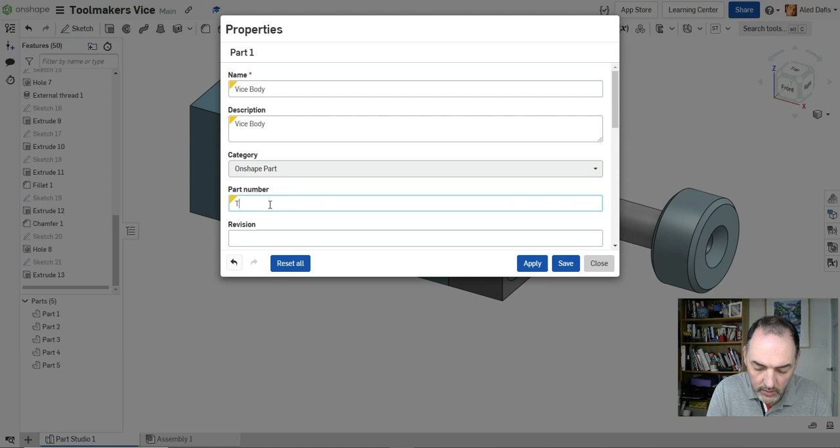So before we start with the engineering drawing, we need to do a little bit of admin. These 5 parts we created need to be labelled and given names. So I'm going to just pick on part 1, right click, properties. Okay, the description for this part is vice body, and we can Control C, give it a name as well, Control V. Okay, the vice body, and give it a part number. I've numbered all of these parts, Toolmakers Vice TV, and this is 001. Apply.

Close. Just to save time, off screen I've renamed all of these parts vice body, vice end cap, vice jaw, vice screw and knurled nut, and given them their part numbers as well as in the drawing that you've got in front of you. So one other admin task that we need to do before we continue with the drawing is to create an assembly.

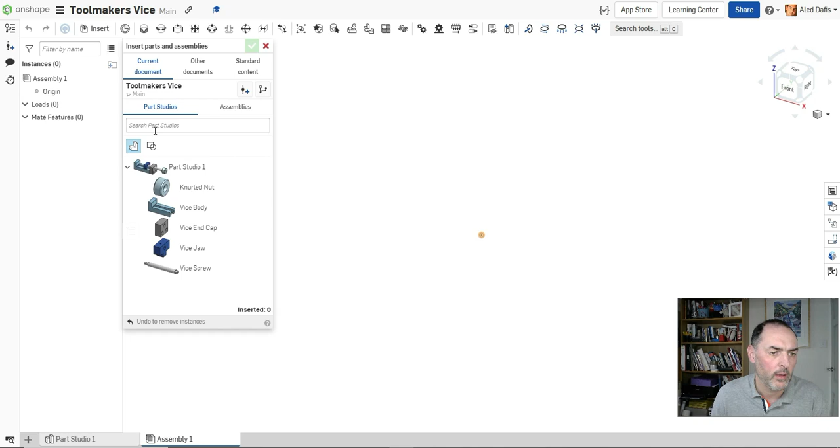Okay, these parts exist in the part studio. We need to create an assembly just to bring these parts in. So we can join parts together. We can do lots of really clever stuff in assemblies, but just for the purpose of this exercise, we're just going to bring them in so they exist in the assembly. I'm going to press Insert, and I'm going to bring the whole part studio in as one part and accept that. Okay, the only reason for doing this is that we can put together a bill of materials in the drawing, which I'll show you in a minute.

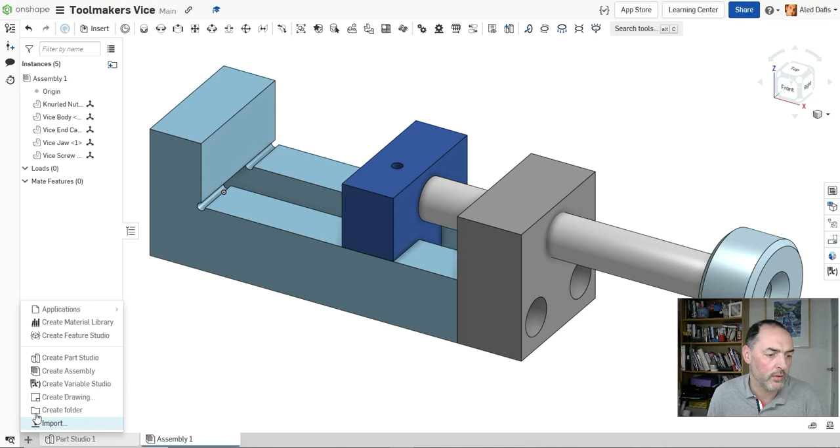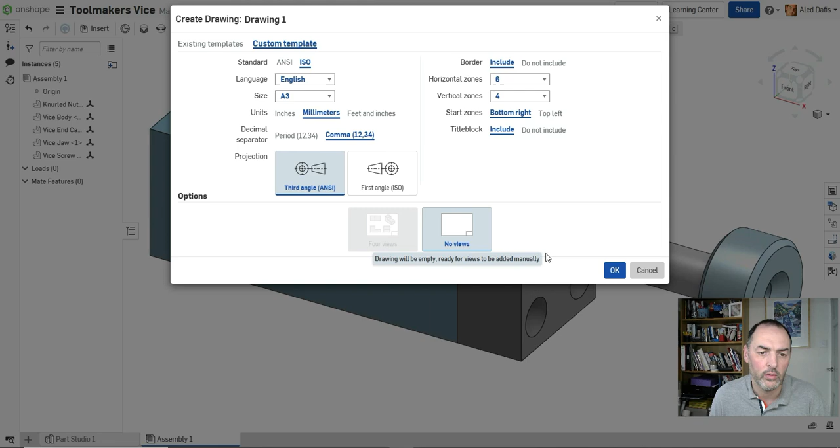Okay, so for the engineering drawing itself, we need to insert a new element, create drawing, and we're going to use a custom template as usual, ISO English. This is going to be an A3 drawing in millimeters using the comma for a decimal separator, third angle, really important, and the border is going to have 6 horizontal zones and 4 vertical zones, including a title block, no views. Just let that load for a minute.

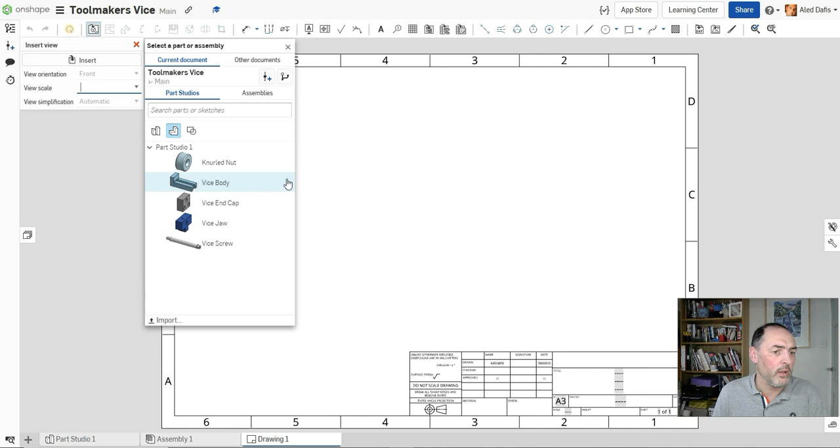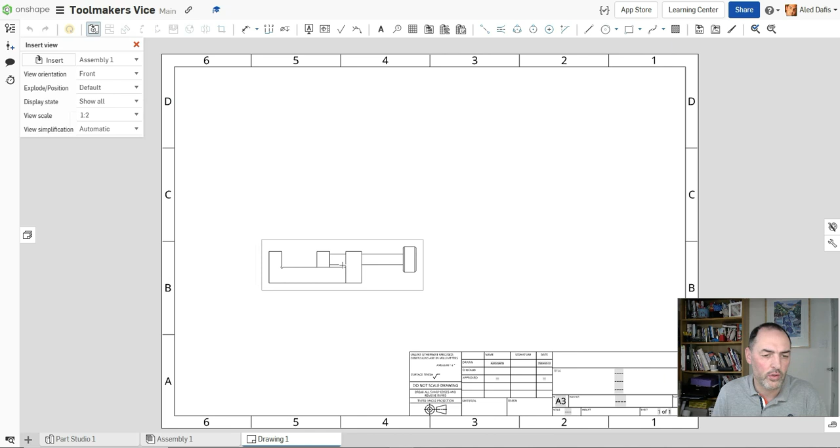There we are, that's our A3 drawing, and we're going to insert an assembly. So rather than part studio, we're going to insert assemblies here. I'm going to insert assembly 1, and that looks a little bit small on my drawing. The view scale is 1:2, so this is showing it half scale. I'm going to change that view scale to 1:1, full scale, and I'm going to drop the view on here. I'm going to drag up and draw a plan view from above.

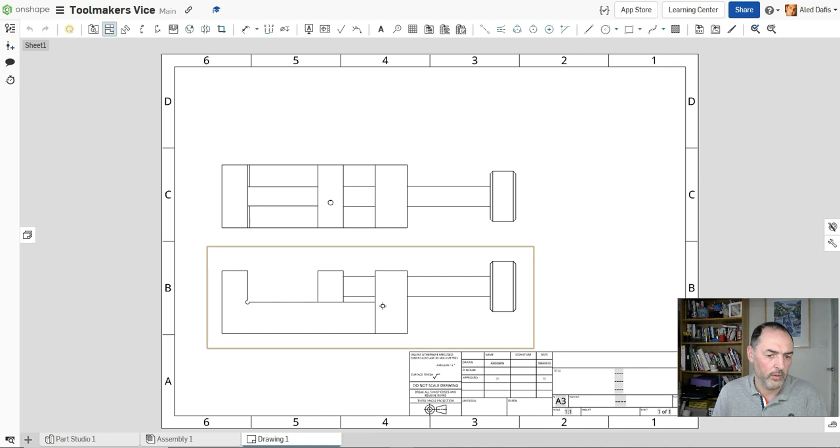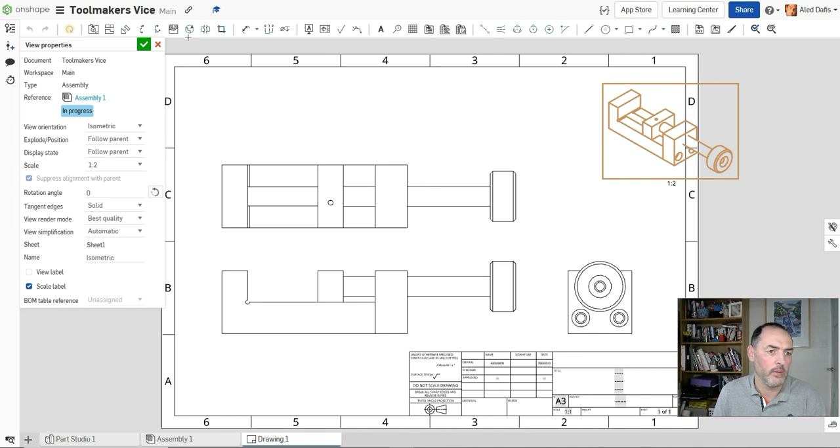I'm going to click on our initial view and come to the right hand side, an end view, and I'm going to do the same again. Click on my initial view, come up to the top right and drop in an isometric view. The isometric view is too big, as we can see there, so I'm just going to press escape, right click on this drawing and go to view properties, and I'm going to change the scale on this back to 1:2 half scale and accept that. I can drag that and place it in the corner there.

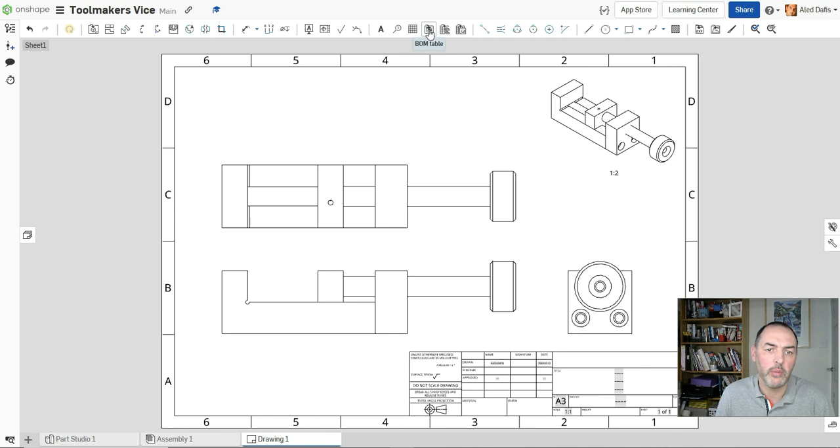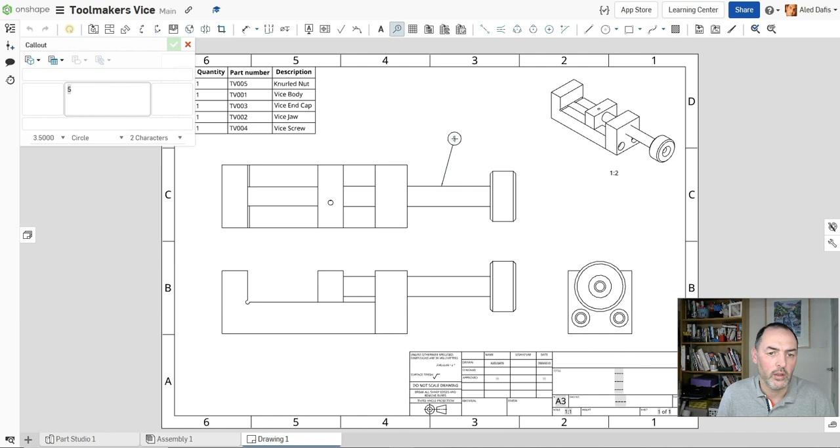Okay, that's really good. So this is just a general arrangement. This shows how all the parts go together, and it's got all 5 parts. Now the little bit of admin we did at the start to name all of these parts comes into play. We create a BOM, bill of materials, at the top here. I'm going to place this bill of materials in the top left corner. You can use the select fixed corner tool here, and then it will just snap to the corner. And that gives us a bill of materials, a parts list if you like, of all the parts, and then call outs, and we can put a call out for each of these parts. Excellent. So we've got all of these parts numbered exactly as we need them.

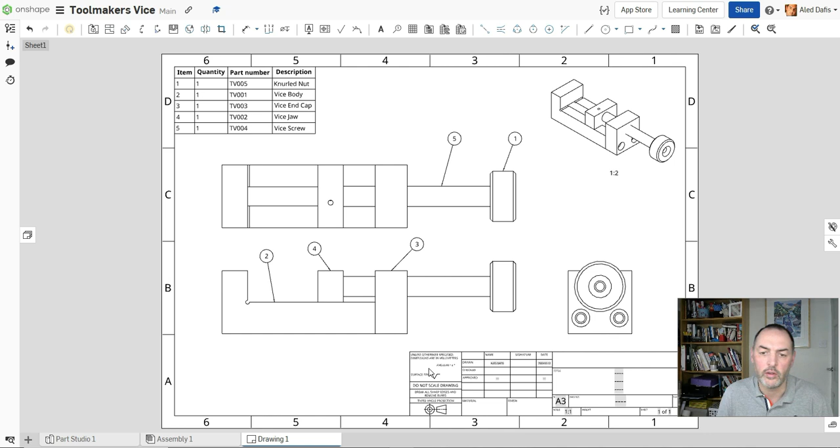Don't forget to add the details into the title block here. Title, Toolmakers Vice, drawing number, material will be bright mild steel, finish will be no finish, and we don't really need tolerances, but we can add in here general tolerance plus or minus 0.25 if you like. And that's all of the drawing block done. You've done that before, I'm not going to waste your time doing that.

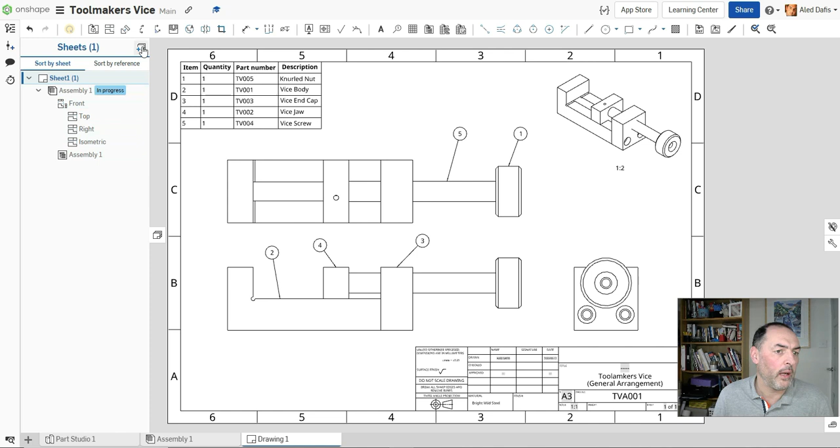Okay, the next step is to add another sheet, a separate sheet. This is the general arrangement, shows how it all goes together. So we're going to pick sheets on the left hand side here, and we're going to add a new sheet. So this automatically opens up a new A3 sheet, and if we're quite crafty we can fit all of these parts onto an A3 sheet, or if you want, add a few of the parts on, and then add another sheet to put all of them on.

Okay, so we're going to add parts here, insert view. I'm going to click insert. Now we're going to leave these as 1 to 1 full scale, they're smaller. I'm going to add the vice body.

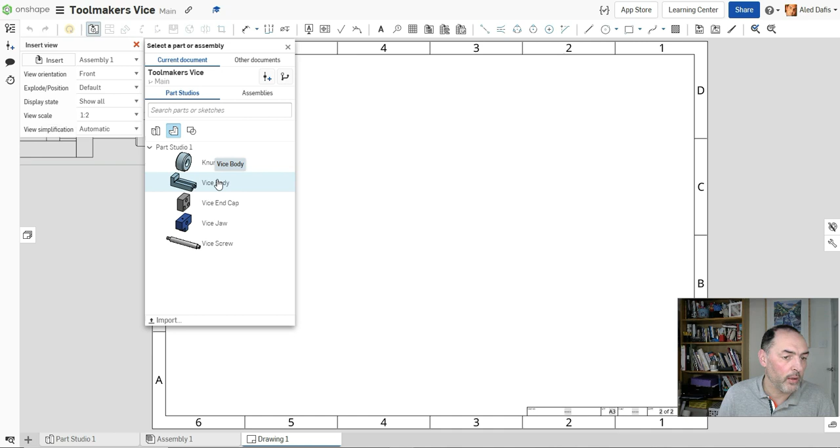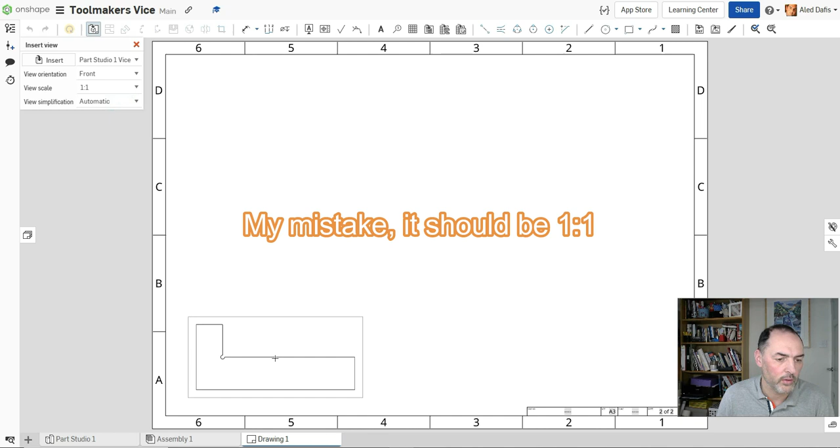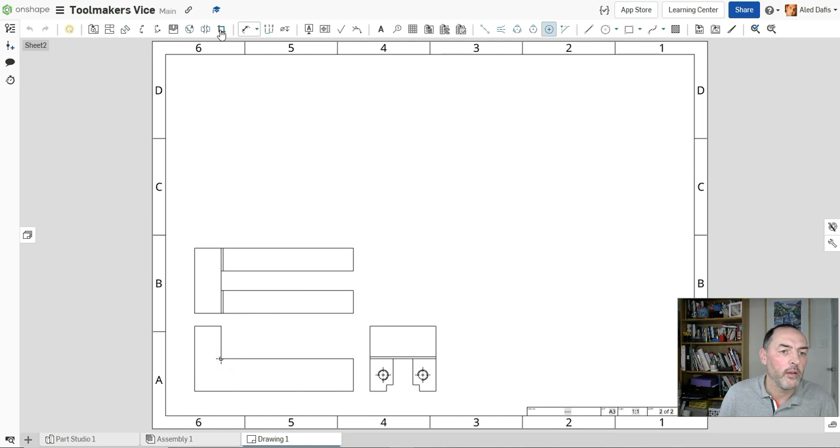Actually, full scale again, I'll drop that in the corner there. I'm going to add a projected view above and a view from the side, like that. Now we can add the details onto this, the dimensions and so on. I'm going to add a center mark here, and then I'll start dimensioning the part.

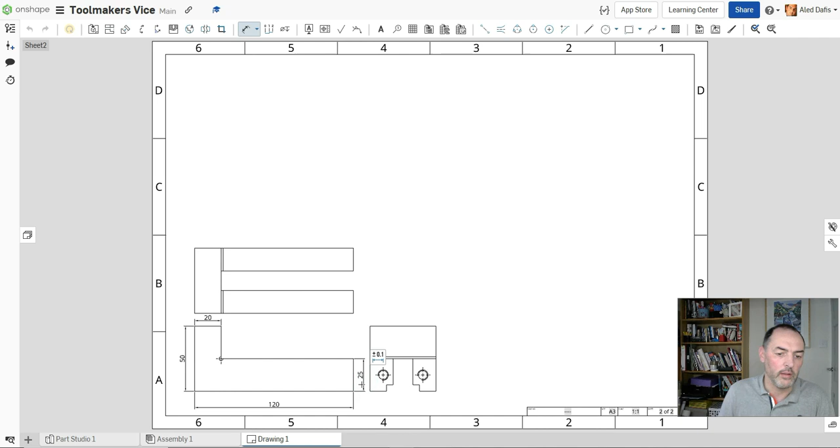120, 50, all of these dimensions now are baked into the model. If we notice anything that we need to change, we can do so at any time, going back to the part studio.

The dimensions for the holes, it's always nice to get them all to line up, so you can pick up the dotted lines like so.

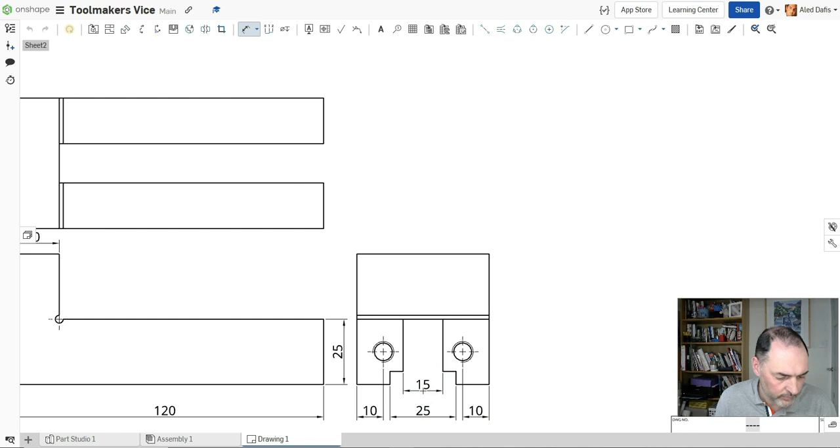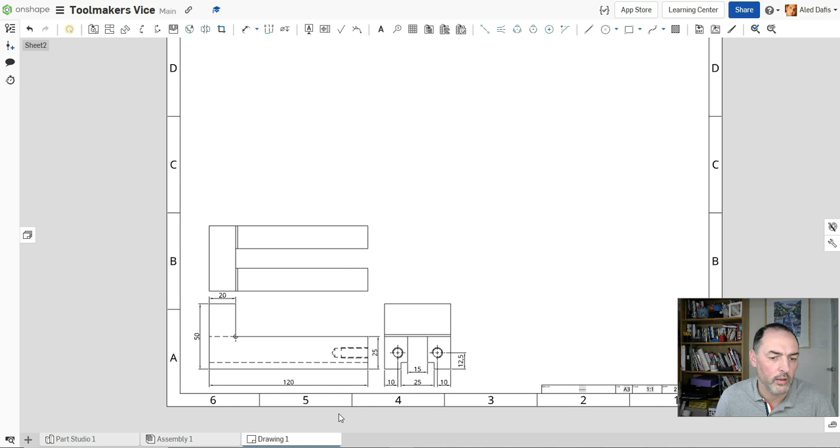You'll notice here that we can see all of the external details, but the hidden details are not shown, so I'll just show you how to do that. Right click and show hide hidden lines, and we can see then that the hidden lines are added in as dashed lines that go through. So they're worth adding, so the engineer making this part will be able to see what's going on, like that.

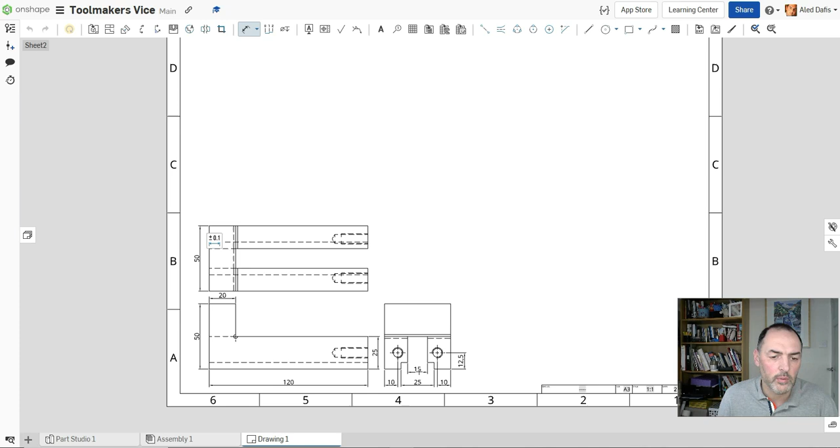Fabulous, one more dimension to add. Use the dimension tool, dimension of that line there, get them all to line up. We need to add thread details to these holes.

Because we've modeled all the thread details in, it's baked into the model, so I can now pick the hole thread call out tool and drag out. Now this is really clever, it tells us that it's an M8 by 1.25 thread, 20 deep, but it also tells us that we need to drill a hole 6.8 diameter and drill that 25 deep.

Okay, so that's all the details we need to produce these holes in the workshop. Saves us going to our engineer's black book to find all of the thread details. It's all on the drawing there for the engineer.

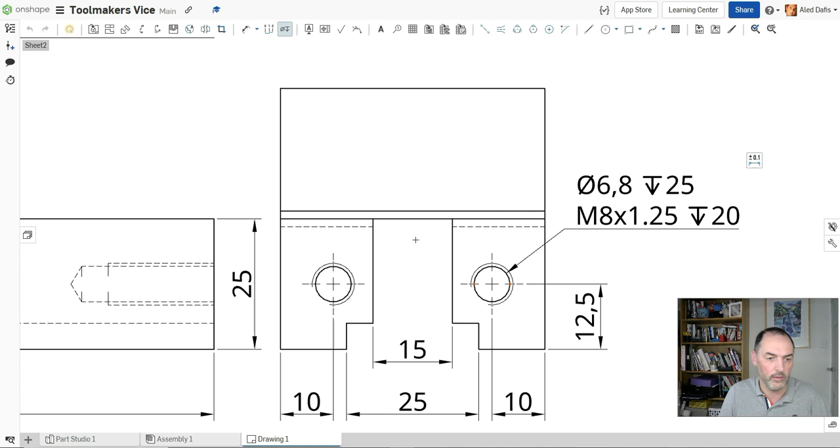Just add a dimension onto this, and that's a R1.5 3mm hole going through there for that clearance.

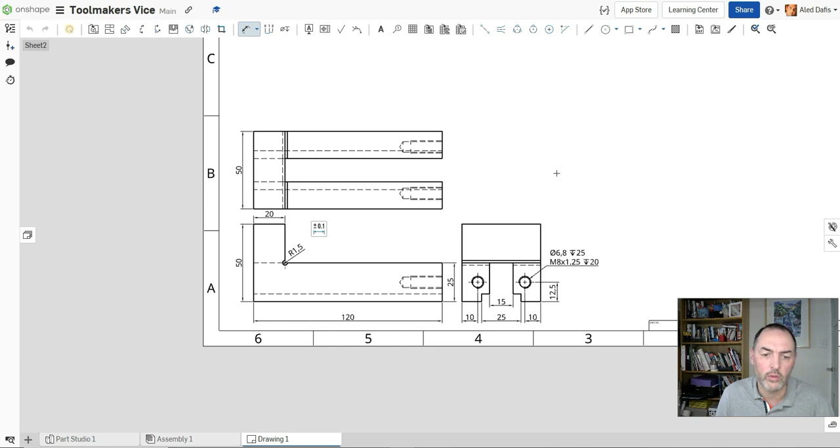So now I'll continue with dimensioning all the other parts. That's the basics, you don't really need to be too concerned about what I'm doing next. I'll do that in fast forward mode so you can see what I'm doing, but I'm sure you have all the skills you need to put all the rest of the details on the page.

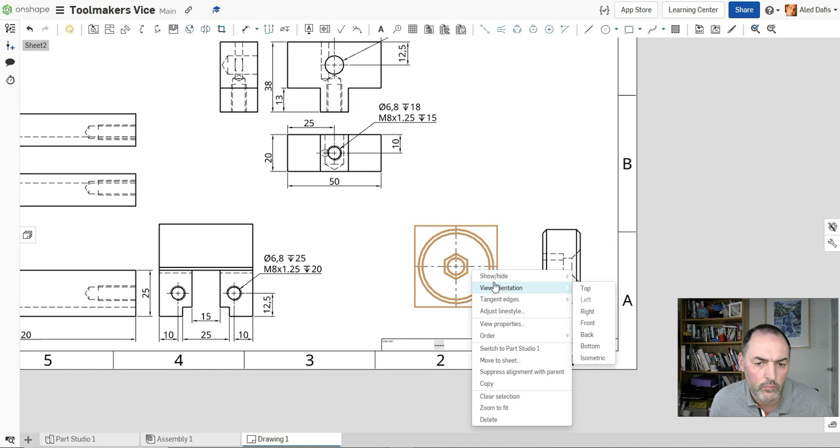Go back to sheet 2. Right, I'm just going to move these up a little bit. Again, the beauty of using CAD is we can change things, and notice that the views line up perfectly as well. So I'm going to go to this initial view that I put on, right click and view properties.

And I'm going to add a view label. Click on this little box here, and I'm going to put the part title in there, vice body, and I'm going to also add in the number TV001, and we'll accept that. Notice that it overlaps that dimension, so I'm just going to drag it down a little bit to there. Okay, and I'll do the same for all the parts so we know exactly where they are.

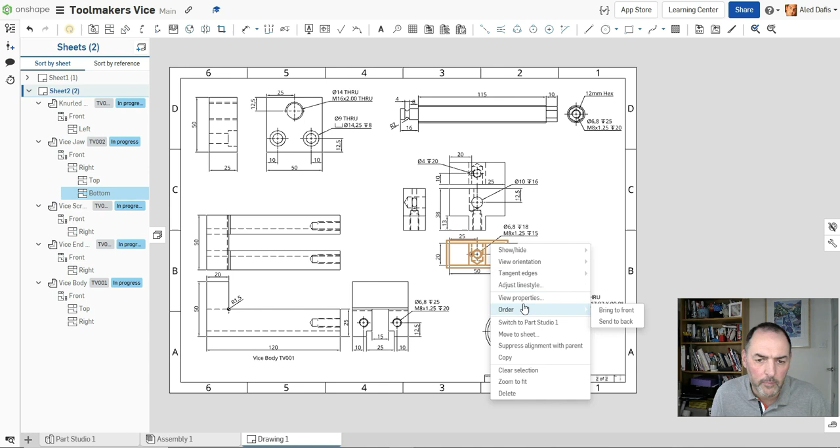So I'll right click, view properties, I'll do the same again, view label, this is the vice jaw, TV002, accept, and so on. I'll just carry on in high speed.

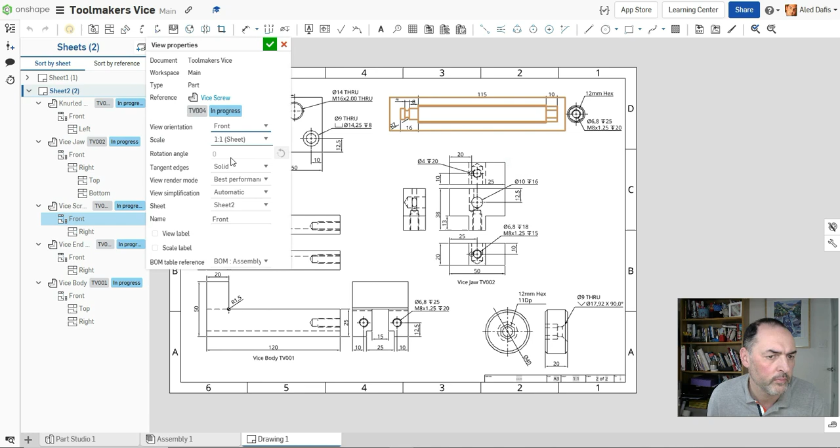And that's all we've got left to do now, is to add some notes on the drawing, just to mention about materials and tolerances and so on. So I'm just going to use the note tool at the top here, click on note, and then type in the details.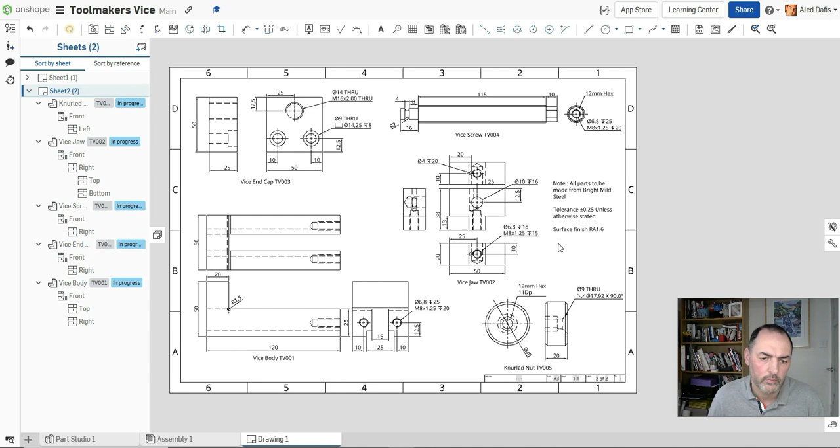And I'll just add the title back in, the drawing number in here, TVA 001, and it states in the corner, if I just accept that, states in the corner that it's an A3 drawing, sheet 2 of 2. Because we created sheet 1 earlier, this is sheet 2.

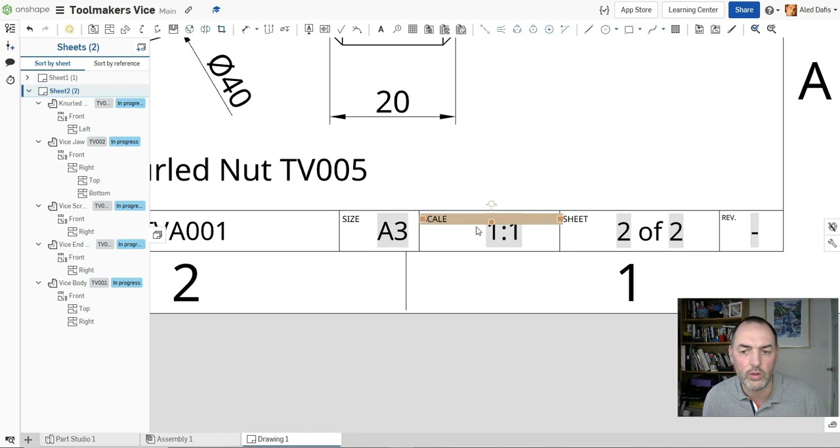And there we have it, all the details we need, or should have all the details we need to produce this part in the workshop.